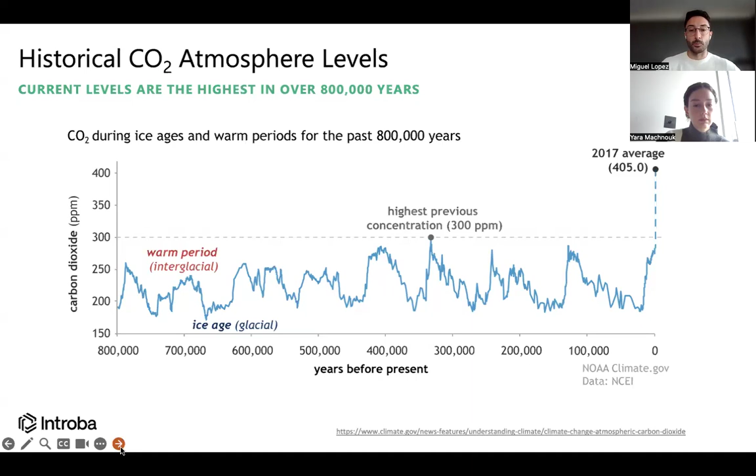It is true that this is kind of one of these myths, like 'oh, climate is always changing.' And we can actually see, yes, there have been ice ages when the concentration of carbon is at its lowest, and interglacial periods when it's at its highest. But we have basically broken the system with current emissions. Just for context, the difference in carbon from the highest point to now is basically the same amount as the difference from that point to a glacial age. Normally, the amount of carbon the Earth would add to the atmosphere in 20,000 years, we have added in 200. So we're talking about changes at a planetary scale.

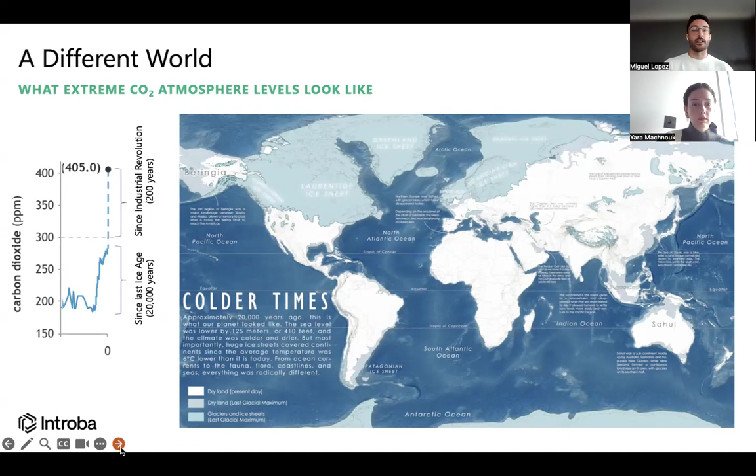So this is very important, essentially. And when we start to point fingers or see, okay, who's responsible—actually, the building sector is responsible for around 39% of all emissions, between running the buildings and actually building the buildings.

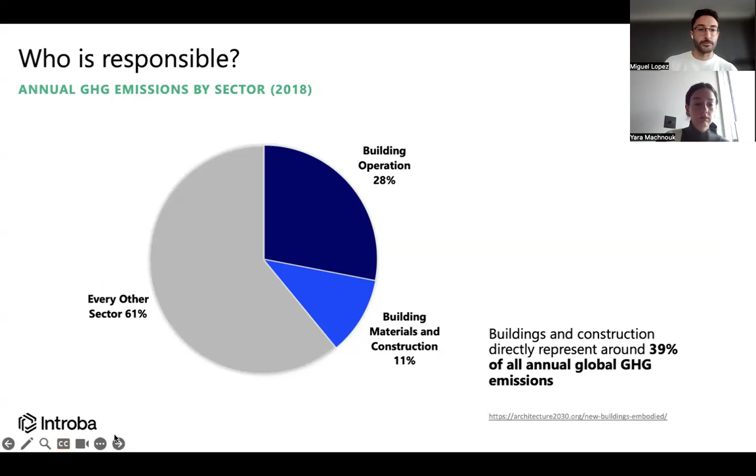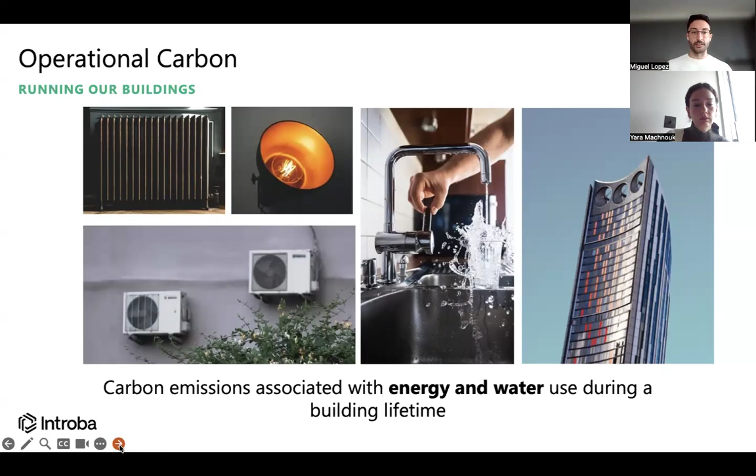That's what we call the two different types of carbon emissions: operational carbon and embodied carbon. Operational carbon is the carbon emissions associated with energy and water during the building lifetime, essentially running and using the building. Embodied carbon is the amount of CO2 and other greenhouse gases emitted during manufacture, transport, and construction, together with the end-of-life emissions.

When we look at whole life carbon, we try to look at the entire life cycle of the building. In the lifespan chart on the left, we can see some initial emissions being emitted - that's the embodied carbon up to the construction stage. Then during the use of the building, there are emissions happening year after year, and then some emissions at the end during the end of life.

When we speak of embodied carbon, if you look to the right, we're basically speaking of stages A, the construction stage; B, the use stage except energy and water; and C, the end of life stage. Together that makes embodied carbon, which is going to be the bulk of this presentation. Then there's stage D, which is beyond the scope - the potential for recycling and reusing.

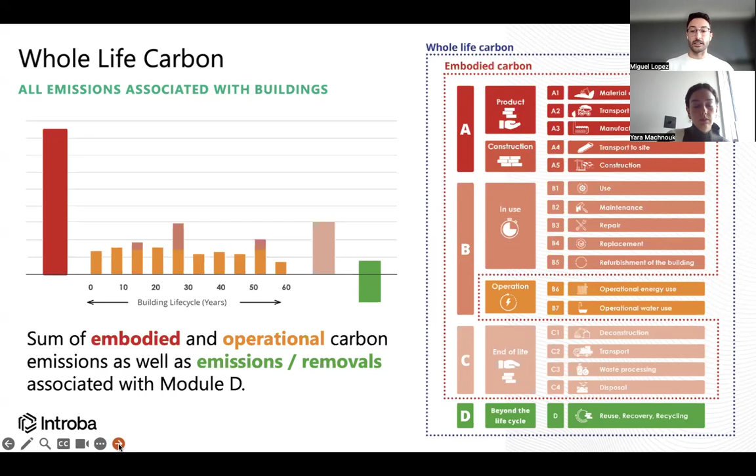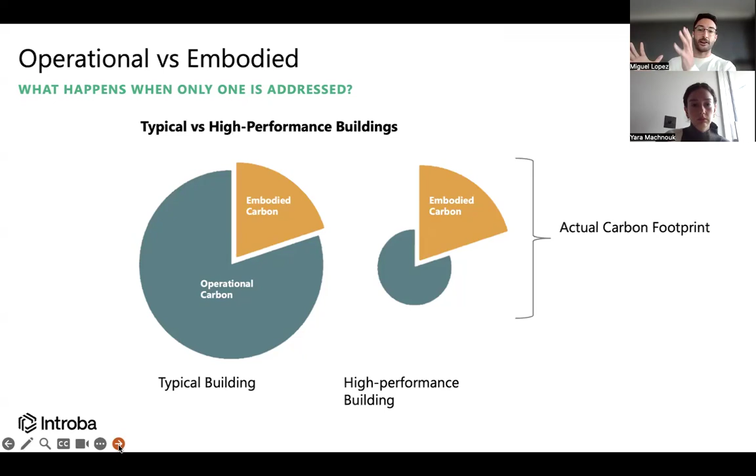So what happens when only one of them is addressed? A typical building years ago had a massive operational carbon and a smaller embodied carbon. But through decades of investment in renewables and improving thermal performance, the operational carbon part has been shrinking while the embodied carbon part has remained essentially the same. This means we believe we're doing a great job on the operational side, but we're ignoring the other half of the equation entirely. So a high performance building could be great operationally but still have a huge embodied carbon sticking out, and the actual carbon footprint is much bigger than expected.

So how do we solve this? We have to acknowledge both sides of the equation - not only the energy side and the operational side, but it's also essential that we acknowledge the emissions and the impact the materials have.

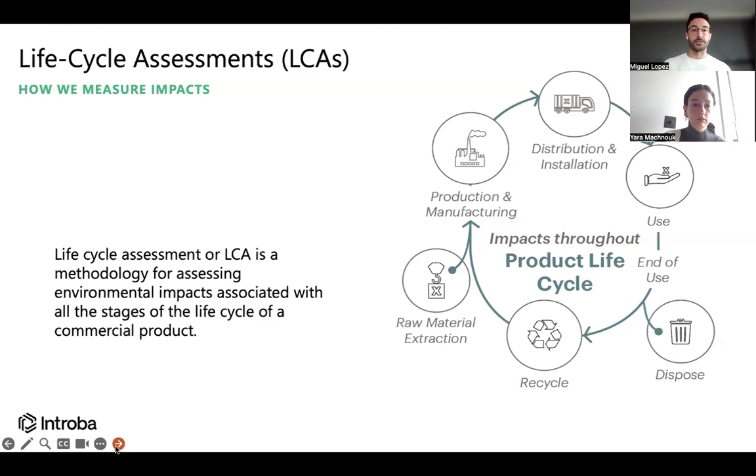So how do we actually go about measuring this? We do this with an LCA, also known as life cycle assessment. Essentially, it's a standardized methodology to assess the environmental impacts of a product in all of its stages. In this case, the product is a building, but we can do an LCA of anything basically. When you do an LCA, you can get environmental impacts that go way beyond carbon, for example ozone layer depletion. But for today, we're just going to focus on greenhouse gases.

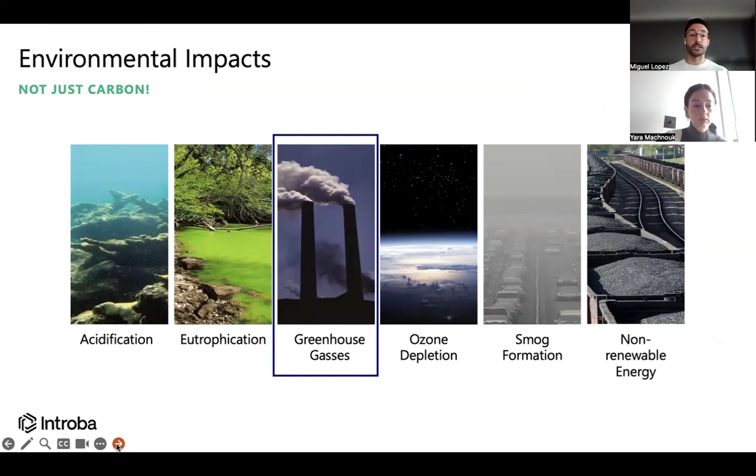The unit that is always used, the standardized one, is kilograms of CO2e. The E stands for equivalent, because we acknowledge there's more than one greenhouse gas involved, like methane, but it would be a chaotic mess if we tried to acknowledge every single gas separately. So we just put them all together as an equivalent greenhouse effect of carbon dioxide - we express everything as carbon dioxide, but we acknowledge there's more than one greenhouse gas involved.

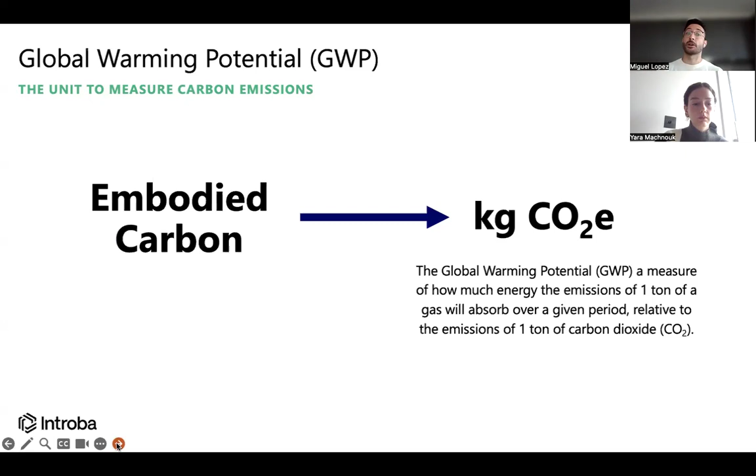The way we do this is with an EPD, which stands for Environmental Product Declaration. It's kind of like an LCA but for a product. It's a standardized way to get all the information as to what the environmental impacts of a product are. It can be a brick, it can be spray polyurethane like in the example. I always compare it to the nutritional label in food - it gives us in transparency and detail the environmental impacts of a product in a way that's clear and comparable.

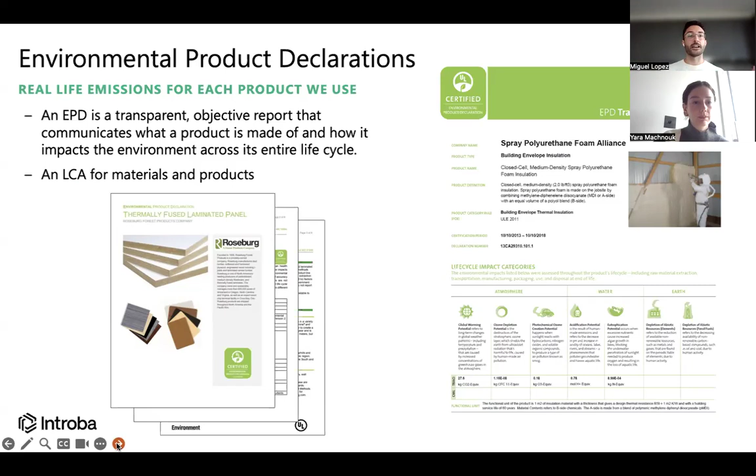Essentially, the equation is quite simple. We need to understand how much, in this case for example 5 kilograms of a material - we can get this information from volume, weight, area, whatever unit we use to quantify it. This can be obtained from BIM, from Revit, from anything. Then you multiply that by the EPD information, the carbon factor - for example, the material has 2 kilograms of CO2 per kilogram of material, so the total is 10. This is a very simplified way; there's much more going on, but this is the bulk of it. We always look at either the material quantity, trying to optimize that, or the material itself and the carbon emissions associated with it.

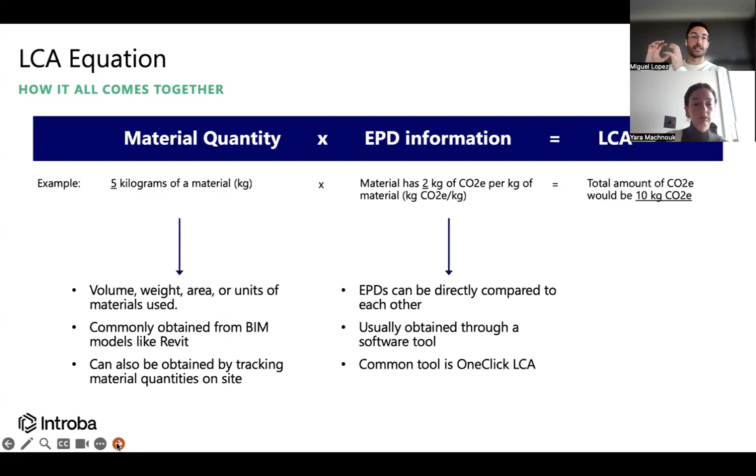So some very, very high level general design principles.

Regarding the structure, it's normally the most impactful component of a building, just because of the materials used and the weight that it has. To begin with, I think the most important thing is to consider the different material options. There are opportunities and consequences for each—mainly I'm speaking timber, concrete, or steel.

Concrete is one of the most, or the most, carbon intensive materials out there due to many different factors. But essentially, timber is currently the key to low carbon buildings. Any low carbon building currently uses timber to a certain degree, or is reusing structure.

Then for the weight, the leaner the better. Again, we're trying to play here with the quantities. If you can do a building with less materials, then down the line that's always better. You can either use this with reusing—again, key—or trying to have very lean, efficient structures. If, for example, you use timber as well, you can have a lighter structure, which means smaller foundations, again less materials.

Complexity—if you have an overly complicated building with an overly complicated structure, that could also be a hindrance in the amount of materials that we're using. And the grid size as well: large grid spans will mean deeper beams, thicker slabs—again, more materials, worse down the line.

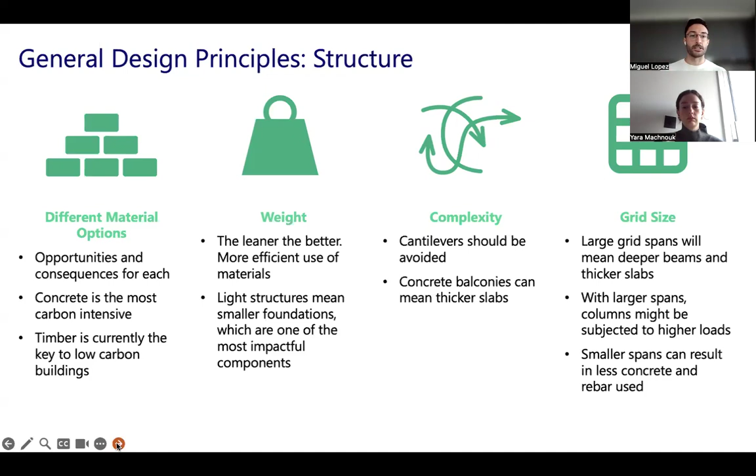And for facades and interiors, this is where we can get a bit more nuanced. For example, different material options—in this case we can use natural materials for insulation like cork, hempcrete, or even straw bale. These are great insulators and they're natural in origin, which means they haven't really used any carbon, and they actually store carbon in them.

Performance components—it's very important when we're talking about facades that we consider the service life of the materials. Sometimes it's best to spend a bit more money on a high quality window that will last you 20 or 30 years, compared to a cheaper one that would last you 10 years and then you have to replace it again and again. That's carbon down the line as well.

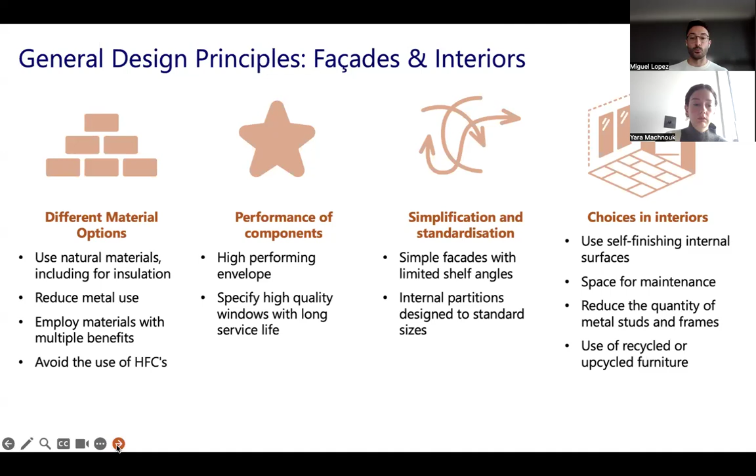And as well as structures, simplify and standardize—the more simple things are, the more lean and less materials you use. And regarding interiors, anything that you can reuse, anything that you can recycle, and reducing quantities wherever you can is always key to having a low carbon building.

Thank you, Miguel. So we'll transition on to the impact of MEP in all of this. As you'll have just noticed, Miguel touched on some general design principles for facade, interiors, and structure, and I will focus on how you can impact the MEP.

I think typically what we've seen in the world of EPDs and general benchmarks around LCAs—historically, up until maybe around two years ago, it was really hard to find data on MEP systems and equipment. It's rare to find EPDs that cover a lot of MEP products, and understanding how much MEP actually has an impact on embodied carbon was difficult to quantify.

Going back to the equation of how you do an LCA, it's two factors. So the quantity side was something that was quite challenging for MEP. With advancements in BIM recently, and the way we model buildings during design stages, we've been able to extract quantities in a more efficient and more accurate way, which has helped fill that gap.

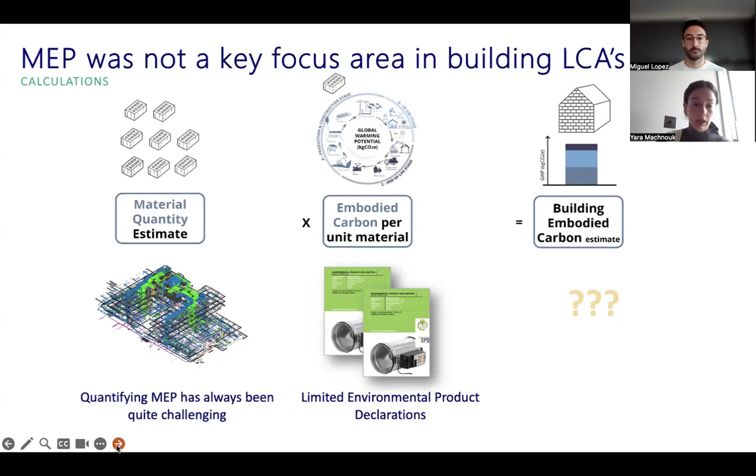And then in filling the gap of what is the embodied carbon for those specific products—as I mentioned, there's always been limited EPDs for MEP products. So this is where TM65 can come in and help to fill that gap.

Before going into that, just to cover why the embodied carbon of MEP even matters—initially what was being done was a standard figure for MEP was being added to every LCA. Partially because there is difficulty in understanding how to calculate it, but also I guess there's an assumption that we're not sure how big or small this number should be, so let's just go with the standard figure.

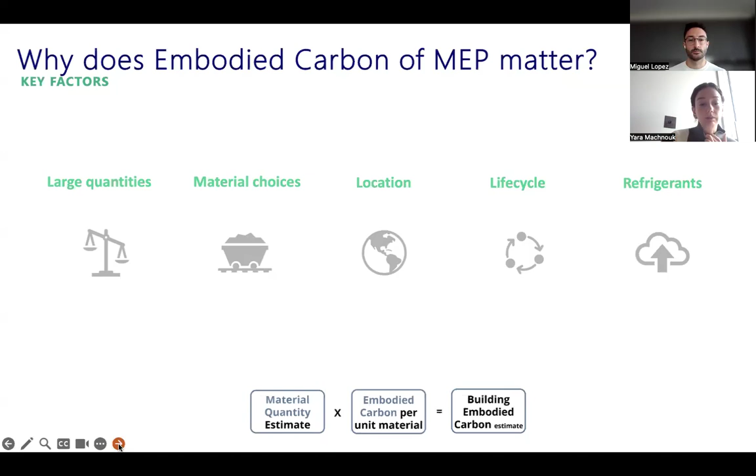But actually, when you look into it, there are some key factors which make the embodied carbon of MEP quite high in the overall building LCA. There are 5 factors here that we'll quickly go through—each will affect one of the two parts of the equation, either the quantities or the actual GWP embodied carbon value of that material. So first of all, quantities: we touched on the difficulty of actually quantifying what's in the building, but not just the difficulty in quantifying it—there's also a lot of products that go in there.

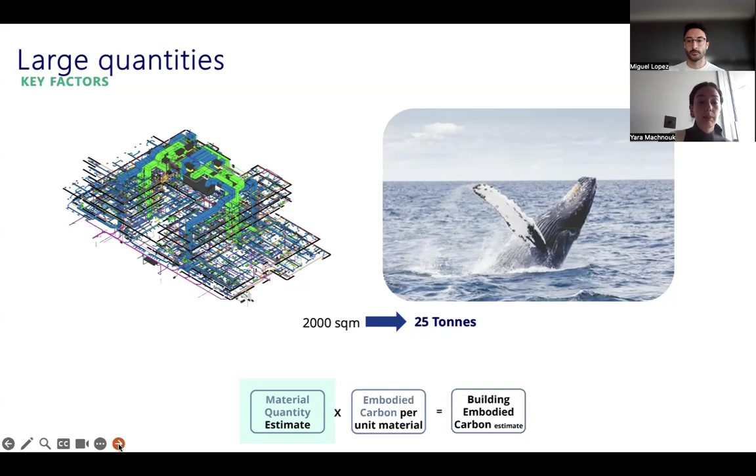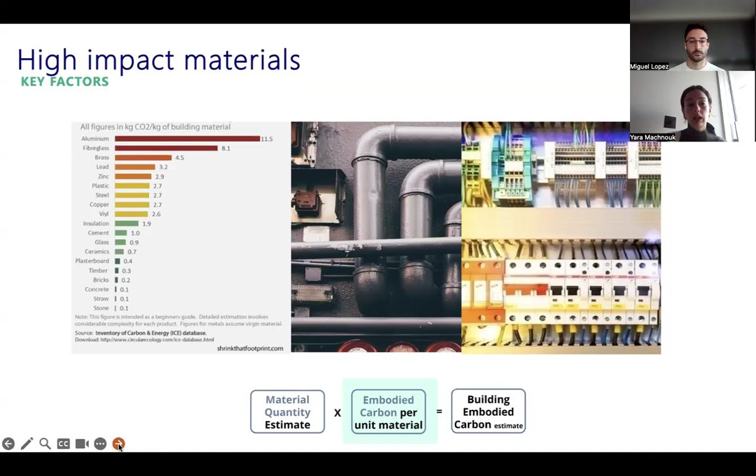One thing with MEP is that it's typically something we don't see in all buildings, it's hidden underneath floorboards or ceiling tiles. If you extract that, whether through BIM or building surveys, with all the cables, wiring, light fixtures and everything going into a building, it actually amounts to a really high amount of material. You multiply that by kilograms of CO2, which are quite high for these materials. MEP products contain a lot of metals and rare earth materials for things like lighting and electronic components, all of which typically have really high embodied carbon coefficients. So combining the high quantities with high impact materials starts to give you some really high values.

As well as the type of materials, the supply chain also affects embodied carbon. There are key stages within the embodied carbon life cycle, like transport, extraction, and disposal, which has a huge impact. A lot of materials and products we see come from China, and not only do we transport it from there across the world to be used, but it's also transported back to be disposed of, whether reused or recycled at its end of life. So that also has a high impact.

One key thing to consider with MEP is that it has high replacement rates throughout a building's lifetime. If we consider the standard building lifetime span for an LCA is about 60 years, and think of the services within that, it ranges between 5 to 10 to 20 years depending on the product. So throughout the lifetime of the project, you could be replacing specific components 5 or 6 times, meaning you're taking it out, disposing of it, and putting a new material in.

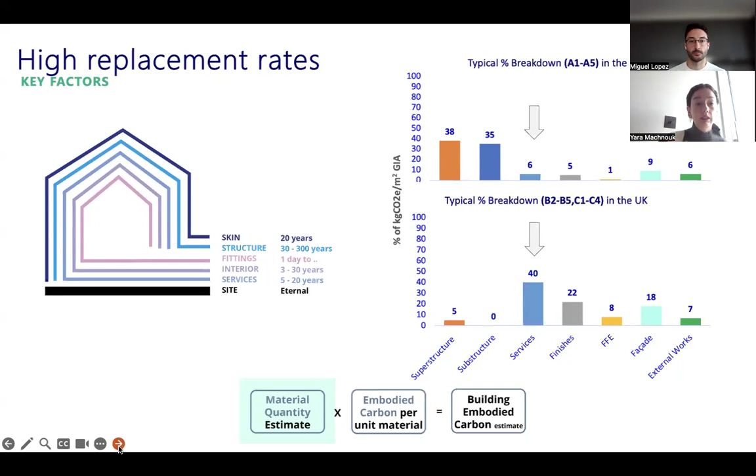But when you look at the lifetime of the project, the second graph below, which looks at the B and C stages, you'll see that services jumps up to around 40%, whereas substructure and superstructure stays much lower. There's less replacement in that, but services you're going to need to replace a lot every time it reaches end of life or gets worn. So that's something to consider with lifetime.

Finally, refrigerants. Refrigerants are a key component of a lot of building services equipment, like heat pumps or VRF systems that we're seeing more and more of. It's really important to be conscious of the refrigerant types being used in those products. This diagram shows aluminium on the left, which we'd typically give the biggest bubble to because it's really high embodied carbon from a metals perspective. Looking at that in comparison to some commonly used refrigerants, you can see they actually have a much higher embodied carbon coefficient, and it's not just them being used in products, but they also leak over the lifetime, which has an impact as well.

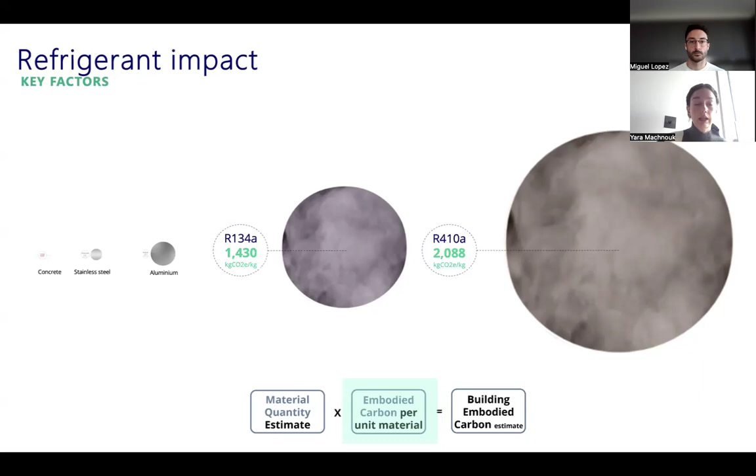This graph shows a range of refrigerants in the market. Different ones work differently with different types of systems, so it's not as easy as just swapping one out for another. They also have efficiency impacts, but it's something to consider, the range of what's in the market and what should be looked at when being specified on projects.

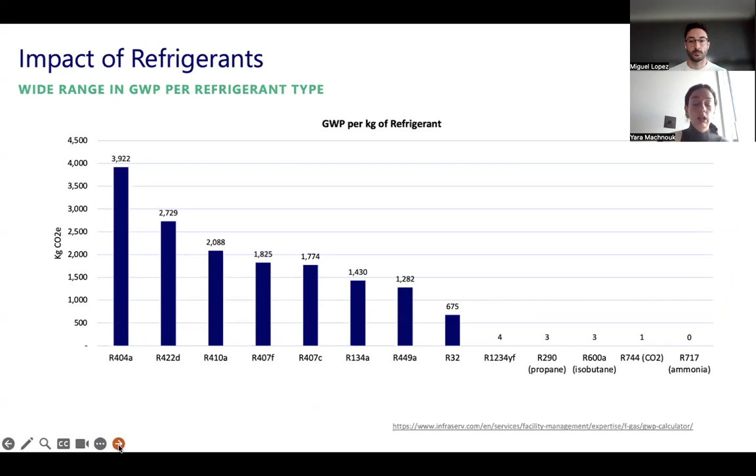And a few design principles to cover on MEP. So we touched on refrigerant, the importance of the type of refrigerant being used, also looking at the leakage rates and the recovery rates at the end of life.

Passive design is really important. So although that involves designing the building fabric and how the building is constructed, that can have a huge impact on the size of MEP products that we're designing into buildings. And essentially with everything embodied carbon, the first thing to do is design less.

So that really helps with that initial first step of designing less to begin with. Optimization, so this is really close collaboration between MEP engineers and also architects to understand distribution lengths, how they interact with architectural elements within the building, and that's really important.

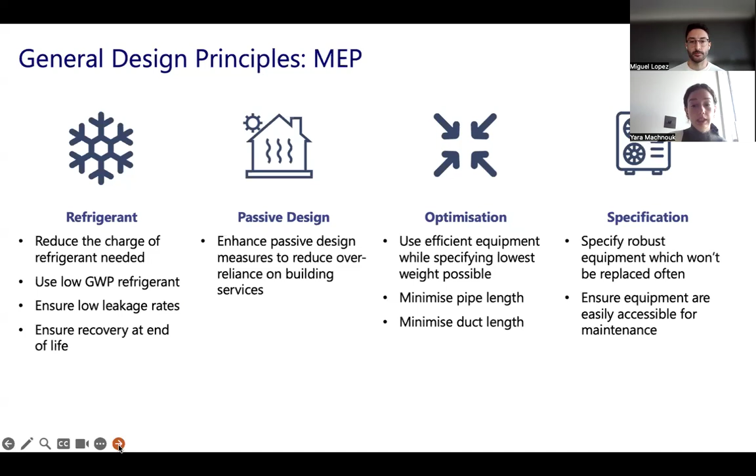And then as well as that, specification. So yeah, just specifying the right equipment that has low embodied carbon values, but also equipment that's long lasting and doesn't need to be replaced as often, and that you can easily access and maintain.

So how does TM65 help to resolve that gap? So what TM65 is, essentially it's a calculation methodology that came out, was published around 2021, end of 2021, which helped to fill that gap of what do we do if we don't have an EPD, but we still want to know what the embodied carbon is of these building services and systems that we're putting in the building. That was obviously a CIBSE collaboration document.

And following that, there's a few research papers that have been done on different sectors within the industry, so residential heating, also looked at logistics centers, and a paper on offices is also coming out soon. So what those topic papers do is essentially pull on the methodology that was created, but apply it to systems that we're more typically seeing in each of these different typologies.

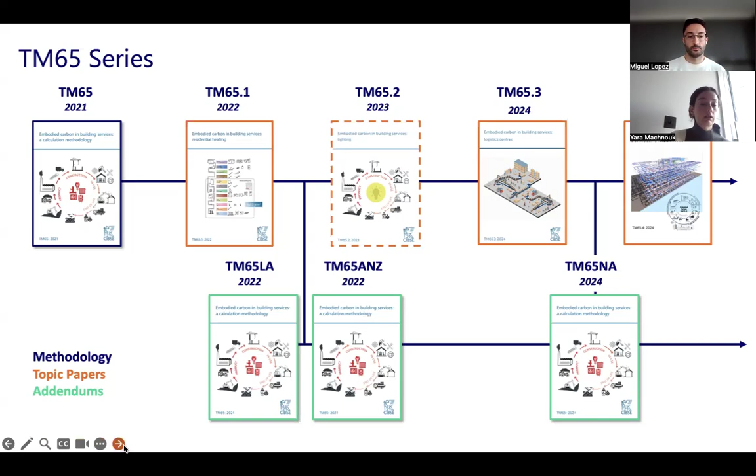As well as that, TM65 started to gain traction in different parts of the world as being a methodology that can be used in other regions. So what was done is we created a local addendum, which basically means this is how you use the TM65 methodology in different parts of the world. So there was documents created for North America, Australia and New Zealand, and I believe the Middle East one as well. So it's great to see that it can also be used in contexts that's not just the UK market, which is what it was originally written for.

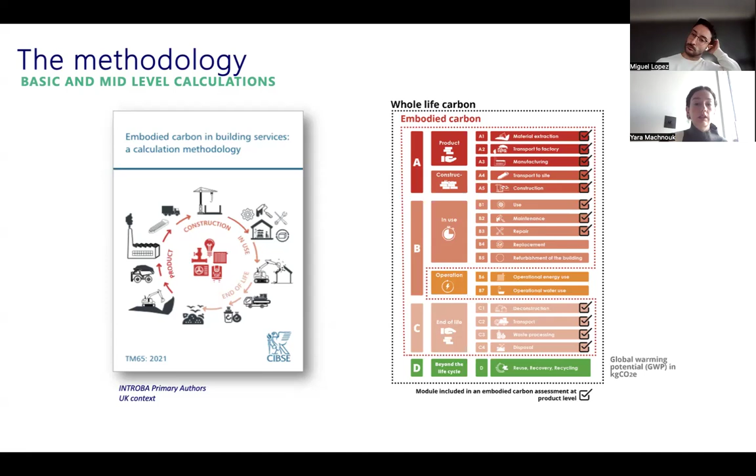The methodology itself, going back to the life cycle stages that Miguel touched on at the start, it covers all the life cycle stages apart from B6 and B7, which is the operational energy and water use. And also B4 and B5 is not included in the methodology because it refers to replacement and refurbishment that happens more on a building level rather than at a product level. But otherwise, all other stages are accounted for in one way or another in the methodology.

And the methodology has three steps to follow. So initially, data collection. It does need collaboration with the manufacturer to get initial data to calculate what the TM65 value is for that product.

There's two kind of options to go down, and we'll cover the difference between them. But there's a basic calculation route for quick results, maybe early stage, and there's also mid-level calculation, which goes into more detail, but essentially needs a bit more information from the manufacturer to do so.

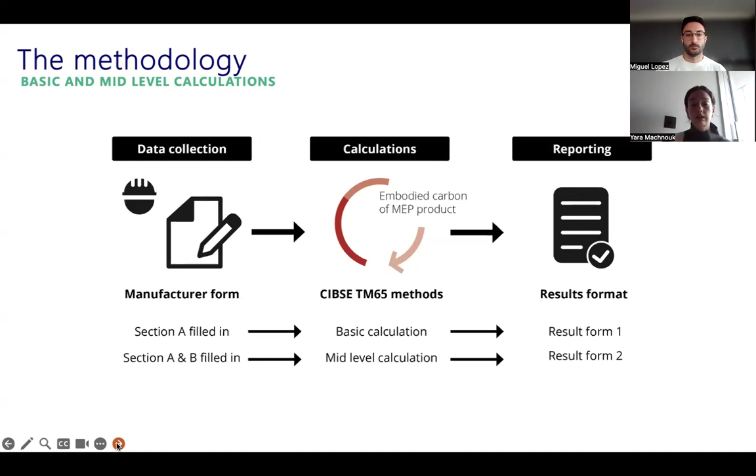And then there's also some standard reporting forms which come with the CIBSE TM65 publication when you download it. And the reason for that is just to ensure consistency and transparency across the industry when the methodology is being used.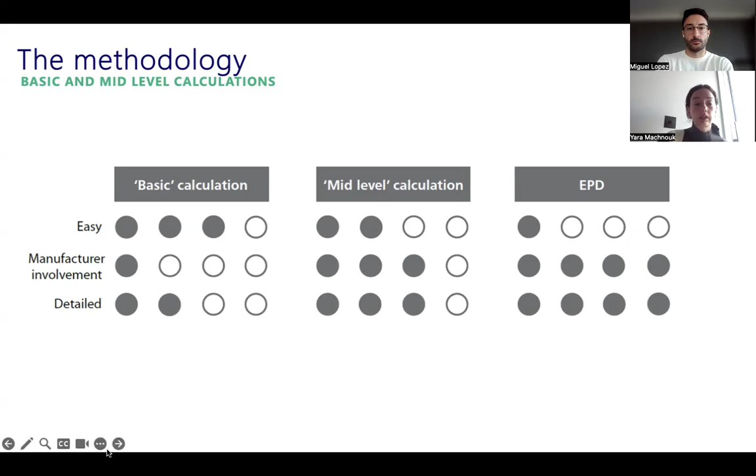So it's something to consider that there's buffer factors and scale factors applied to it. Obviously the mid-level calculation, you start to get a bit more detail, you start to get more manufacturer involvement, and then the EPD obviously is the most detailed you can have, just because it's third-party verified. It's a very standardized methodology that's been around. So that's how the three compare to each other.

And here we just wanted to show you a snapshot of results and how the basic calculation and the mid-level calculation can differ. So if you just look at the top graph, you'll notice there's fewer colors and stages being accounted for. There's also quite a large chunk, which is what is the scale-up factor. And you use that because obviously you're going less into individual calculations for all the different embodied carbon life cycle stages.

So you have to apply a scale factor that basically covers those chunks. If you look at it in the mid-level calculation, you'll see a few more shades of blue, a few more shades of red. Those are all the additional life cycle stages that are being accounted for separately. It gives you a more robust calculation.

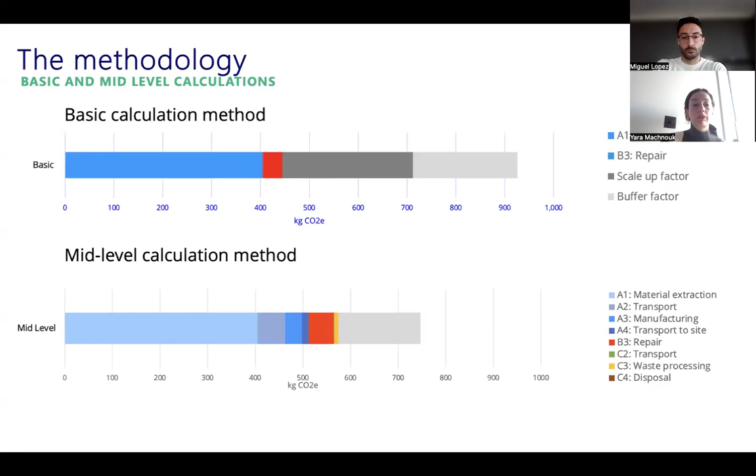When you look at them compared to each other, the mid-level calculation will always be lower, just because there's less of those default scale-up factors being added. And in reality, if there was an EPD done for the exact same product, you'd expect to see that even a tiny bit lower than that. So the methodology is intended to be conservative for that purpose.

Good news, if you do find the methodology itself quite overwhelming and long to do, is that there is an automated embodied carbon calculator on the CIBSE website which can be used. Essentially, you put in the inputs from the manufacturer form, and it will do the calculation for you. So that is an option as well, especially if you're a manufacturer or someone generating a lot of TM65 data points. That's a resource that's available that can be used.

So the next two sections, we just wanted to highlight a few key takeaways from the topic papers and research papers that have been done following the TM65 methodology, and show you where you can take some useful data points, hopefully, to be used.

As I mentioned, this one focused on residential schemes. We looked at 4 different sizes of residential schemes, down to single terraced houses, as well as 15-unit developments, 100-unit, and then 2,000-unit developments. The reason we did that is because the design and the size of systems scales up differently depending on how big or small the building developments are.

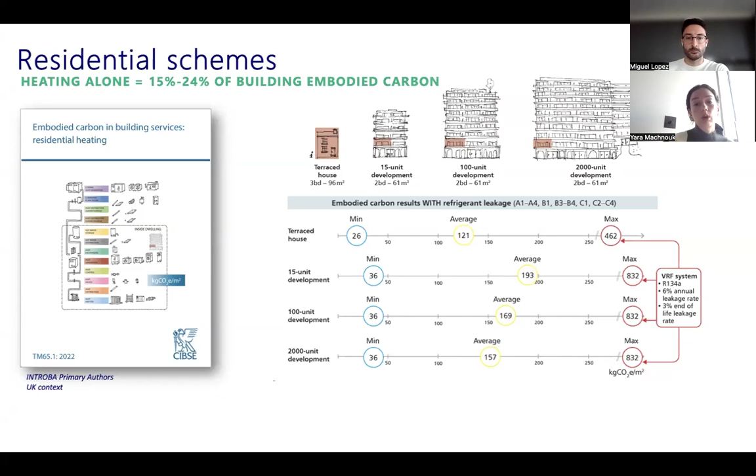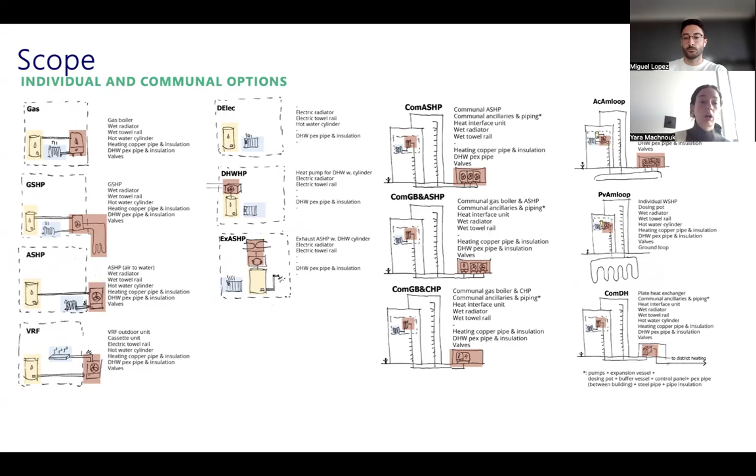Within that, as well as the 4 different sizes, we also looked at a range of about 14 different system options. The ones on the left are all individual system options - things like a gas boiler standard system was used as a baseline, which is what we're seeing in a lot of existing homes at the moment. Then we looked at different configurations for ground source heat pumps, air source heat pumps, VRF, direct electric, hot water heat pumps, and so on, as well as some communal systems for the larger developments - ambient loop systems, combined heat pump, boiler, CHP systems. We looked at a district heating network as well. So we tried to cover the range of systems that we're seeing more commonly within the UK market at the moment.

And the process we did to get to those results really involved a lot of collaboration with manufacturers. This was done, I want to say, 2022, around that time, and it was still new - it was the first topic paper we had done following the methodology. So there was a lot of work to get the industry engaged and try to understand the value of what this can provide. We did have close collaboration with a lot of manufacturers that gave us their data points, and we worked with them to calculate what the TM65 values are.

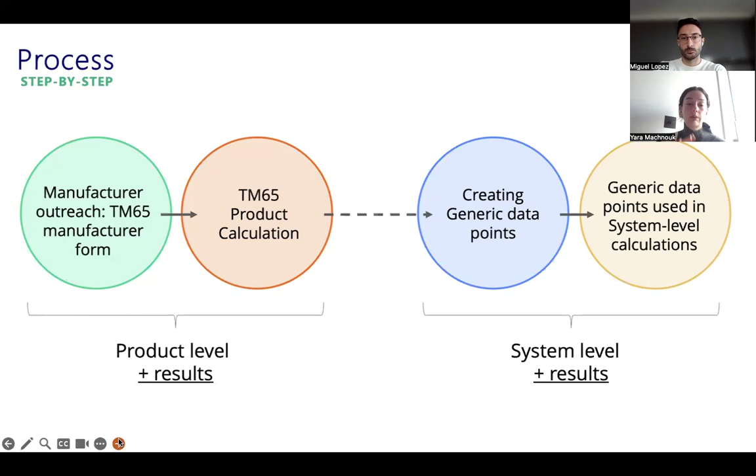From that, we had to get data points for all the different parts of the system that I mentioned before, and then we created generic data points from those. So if we got 5 heat pump data points, we created generic values for those, and we started to extrapolate that into what the system results look like.

An example here is for an air source heat pump. You can see on the graph on the right - we got about 18 different data points for an air source heat pump for different kilowatt bucket sizes. From those, we were able to calculate what the kilogram CO2 is per kilowatt of those heat pumps. Then you'll see the dotted line on the graphs generate what those generic values are. So if you needed a generic value for a heat pump, you could go to that graph and take that value, understanding that it's an average. There's some conservativeness involved in that, but if it's an early stage design, it can definitely be used that way.

All of these graphs are in the document itself, so they can all be found at the back for all the different range of products that we ended up getting data points for.

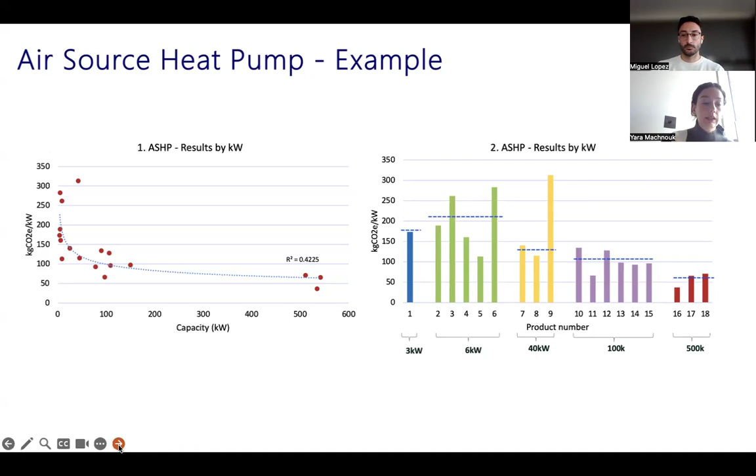We also have this graph that shows the average kilograms of CO2 per kilogram. That functional unit can be used most commonly across all products because all products have a weight. So across everything we looked at, from boilers all the way down to valves, pumps, MVHR systems and so on, we had an average of about 9 kilograms of CO2 per kilogram.

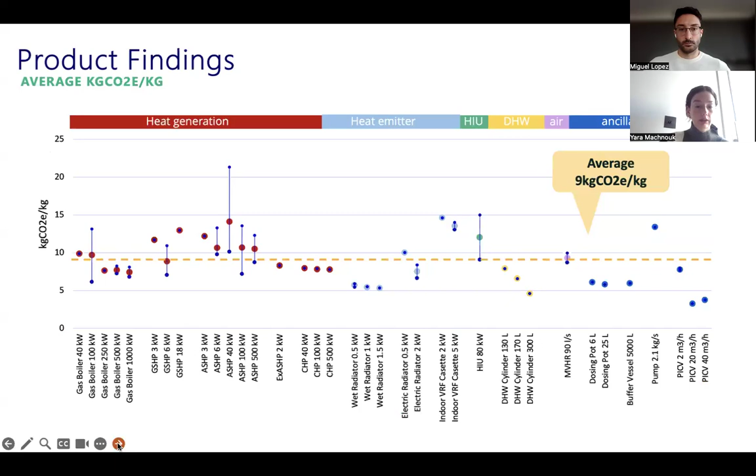And then you can also see which ones are the higher value systems. So this is really helpful, I guess, in early stages if you're trying to decide between system types - what are the factors that are going to affect the embodied carbon of the systems?

One thing to keep in mind that's covered in the document is that this is just a focus on embodied carbon. We always try to emphasize that decision making should be made on a whole life carbon basis. So although some systems might seem really low from an embodied carbon perspective, we need to look at what the operational carbon is and how that building will run most efficiently, and combine those together. It's no use if one is really, really high and one is really, really low - having a balance and reducing as much as possible across both is really key.

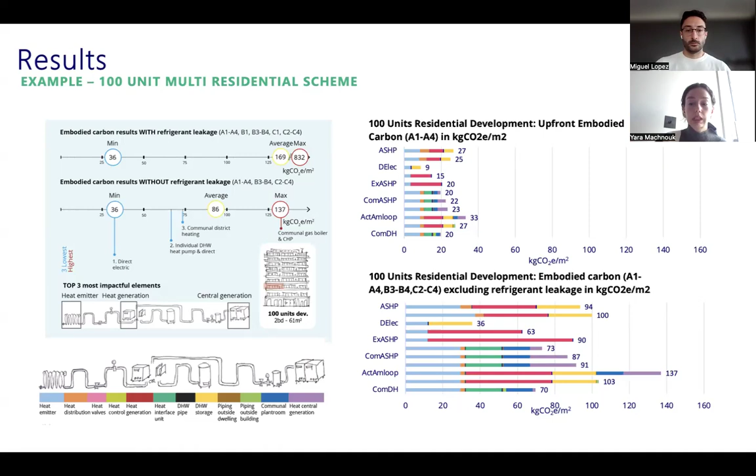And then a couple more slides just to touch on the newest publication released on logistics centers, TM65.3. TM65.3 was a collaboration again with CIBSE, but also with Amazon as well, which was really helpful given their experience and involvement in the industry with logistics centers and distribution centers and so on.

There were also some manufacturers involved, again, to give data points on material handling equipment and bespoke types of machinery used in logistics centers.

So similar to the concept of TM65.1, we started on a product level basis. Obviously the products for this case study look slightly different and involve a lot more conveyors, motors, cabling, and so on. This graph shows the range of what the embodied carbon in kilograms of CO2 per kilogram was for this range of products.

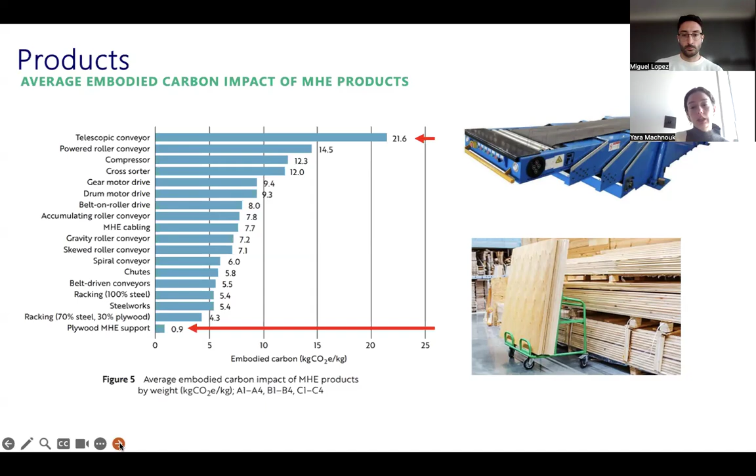Obviously heavier machinery with a lot more metal components and so on comes out higher, and you can see it all the way down to plywood support, which is used within some systems to support and hold different types of machinery. You can see the comparison between those.

And then again, those product level values, combined with the product quantities, were built out and extrapolated to calculate what the life cycle embodied carbon is of different types of systems or processes used in logistics centers.

So here's a breakdown - and this might not be the usual thing that we see in building services, or just design units and residential schemes that we do more regularly. But this is a space where we're seeing a lot of growth happening in distribution centers and data centers and so on. It's just to show that the TM65 methodology can be used to calculate other types of equipment as well.

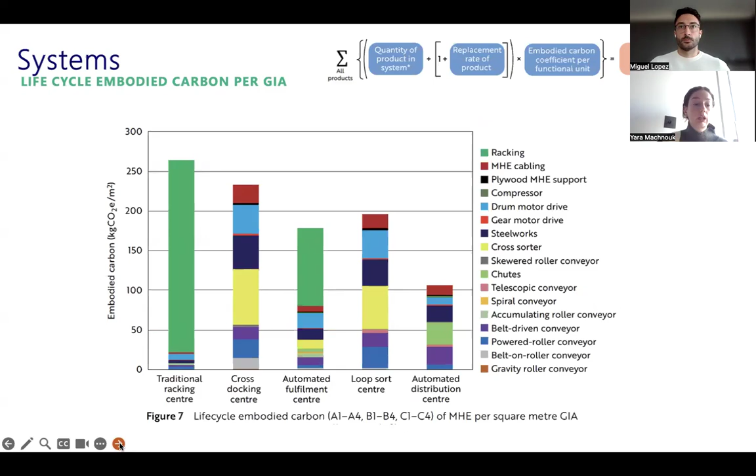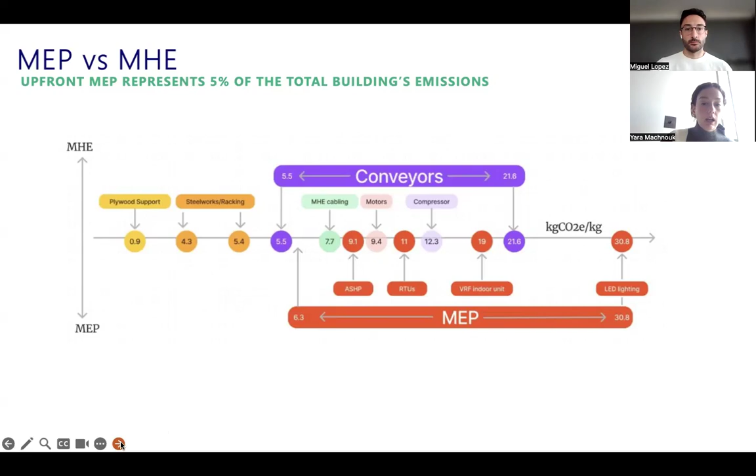I think that's our final slide going through the TM65 methodology and some of our case studies. I'm hoping we're going to move to questions now and hopefully we can answer any questions that have come up.